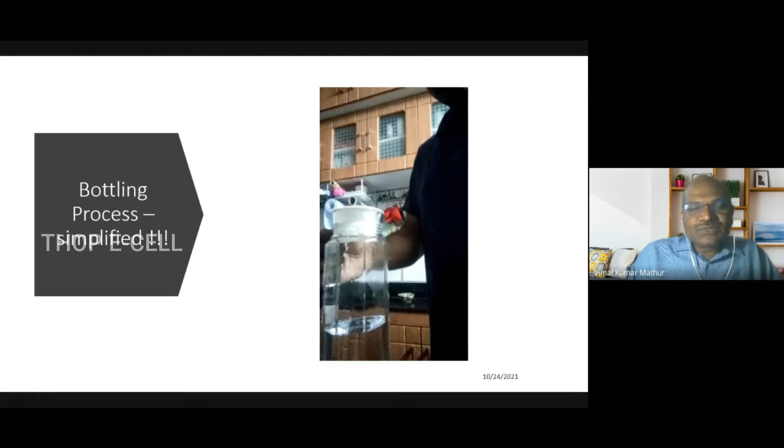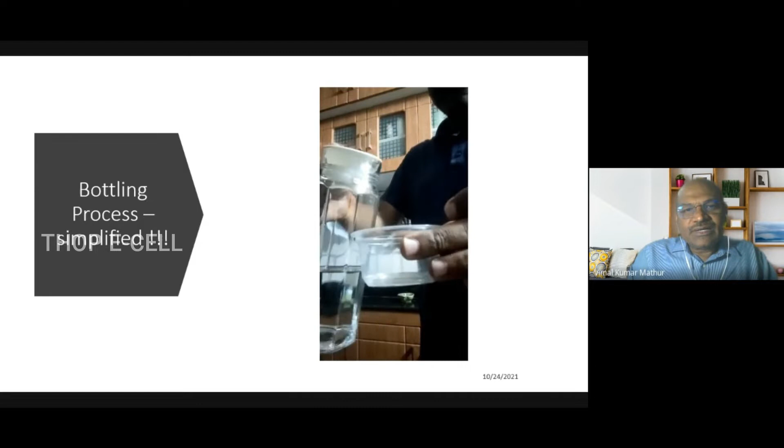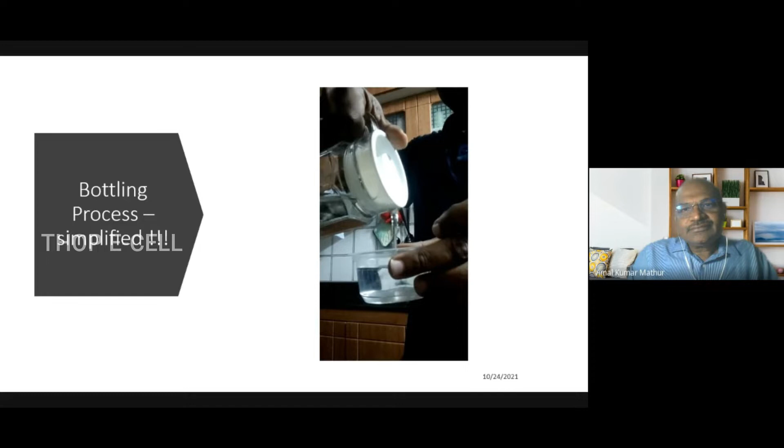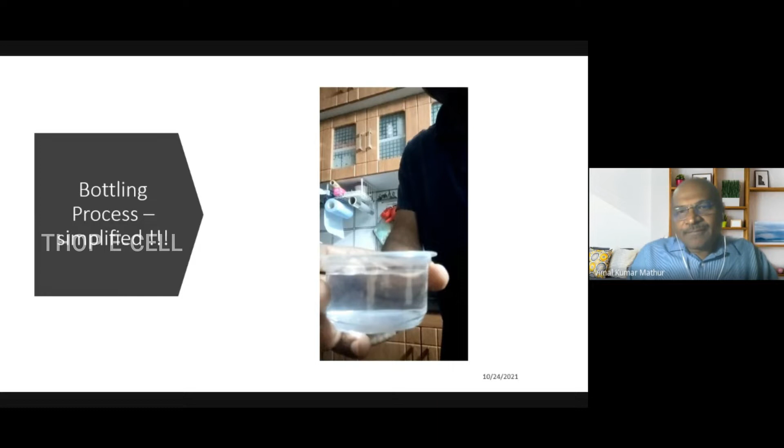To understand this simply, I want to show you one video. Just look at it. You know what we are doing here? We are pouring water from a larger vessel to a smaller vessel. This is the bottling process simplified. This is exactly what we do in a bottling plant. I hope it would have been that simple, but it isn't.

What we are handling here is not water, it is LPG. How many of you know what LPG is? LPG is liquefied petroleum gas, a mixture of butane and propane. You must know the formula of butane and propane. Propane is a C3 compound, butane is a C4 compound. They are mixed in the ratio of 60 to 40%.

And of course, it is highly flammable. The best part of it is that it can be easily liquefied at moderate pressures. This is the best property which we use in the bottling plant.

Just imagine if it was not so. If you were only transporting the LPG as gas to your house, a cylinder would last only one day, and every day you'd have to visit your distributor. Here, what we are doing is liquefying - converting the gas to liquid under moderate pressure, and bottling this in the cylinder. So you're taking home one month's requirement of kitchen energy, and after one month you replace that cylinder.

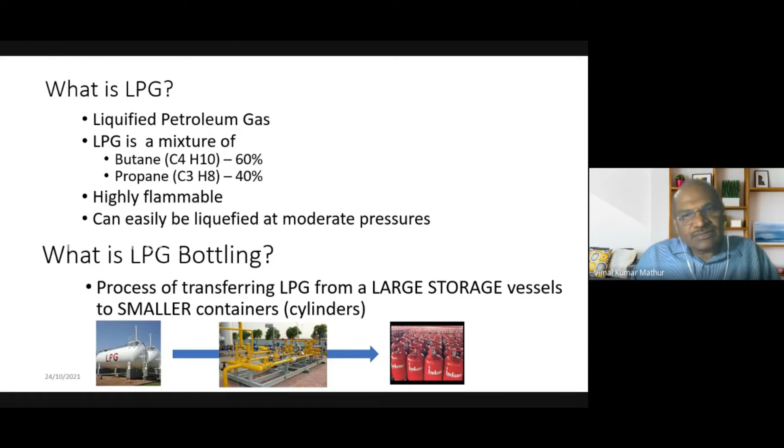Before we deal with LPG bottling plant operations, we have to know certain important properties of LPG. It is colorless. The state in the cylinder - we all think it's liquid LPG - it is both liquid and vapor. The density is only half the weight of water. LPG as gas is twice heavier than air. This is a very important property, because if LPG leaks, it will settle at the ground. It will not go into the air.

Basically it is an odorless compound, but we intentionally add ethyl mercaptan, a sulfur compound added as an odorant, just to give a feeling of a nasty smell in case there is a leakage.

The flash point of propane is minus 104 and butane is minus 60. The boiling point of propane is minus 40 and butane is minus 2. This means that at atmospheric pressure, this liquid will boil. So can we open the lids and transfer LPG? No, we can't, because at atmospheric pressure, it is in the form of a gas. So the entire system is a closed system.

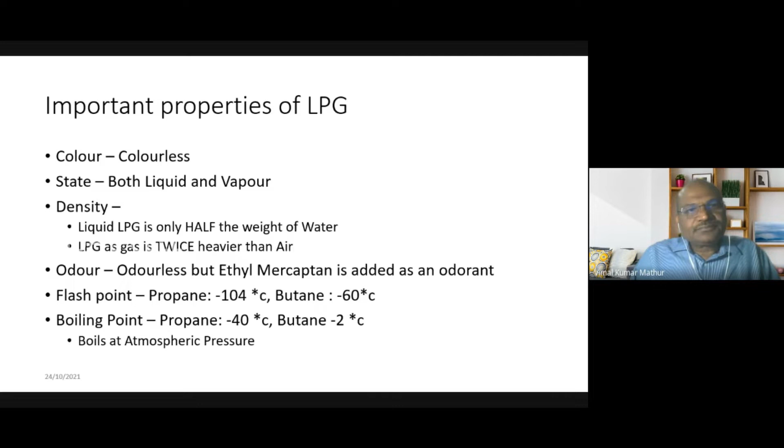This is very important - liquid expansion. With each degree, the LPG liquid will expand 12 times higher than water. The latent heat of evaporation is one sixth that of water. The liquid LPG requires only a small amount of heat to become gaseous - if you just introduce some amount of heat.

So what people generally do is put the cylinder in hot water, and whatever LPG liquid residual is there in the cylinder converts into gas, and they're able to extract that gas. Of course, that's an unsafe procedure, but for understanding, we can use this example.

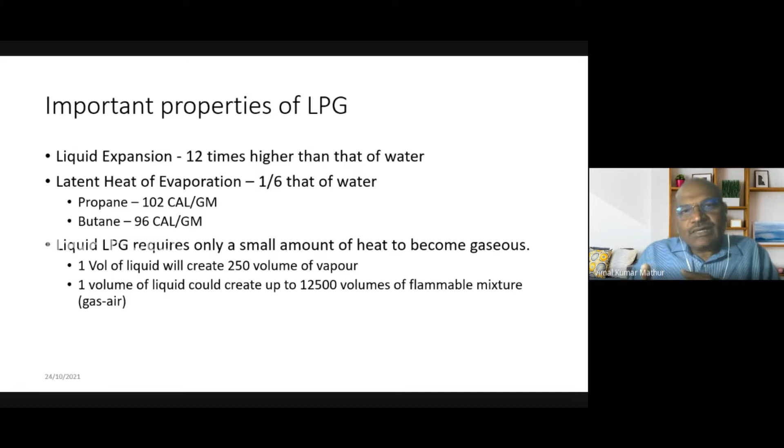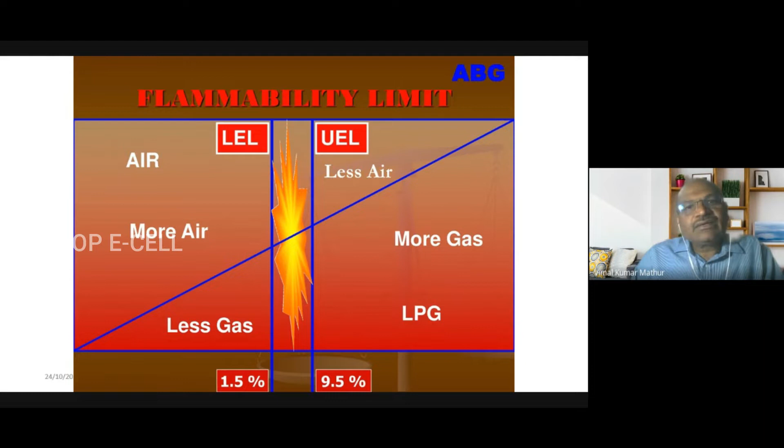The flammability limit means the mixture of air and gas in the atmosphere. If this mixture is less than 1.5%, LPG will not burn. And if this mixture is more than 9.5%, this mixture will not burn. So it is within this small range, 1.5% to 9.5%, that LPG will burn. If it is let out in the air, it will mix with the right amount of air, catch fire, and probably explode.

Let's understand the LPG bottling process. The LPG is received in bulk from manufacturing facilities like refineries. We manufacture or extract LPG from the refineries through the gasification of natural gas or distillation of crude oil. This is the topmost layer of the product which comes out.

Then an LPG bottling plant has a facility to receive, store, and transfer LPG to small containers like LPG cylinders. This we all know.

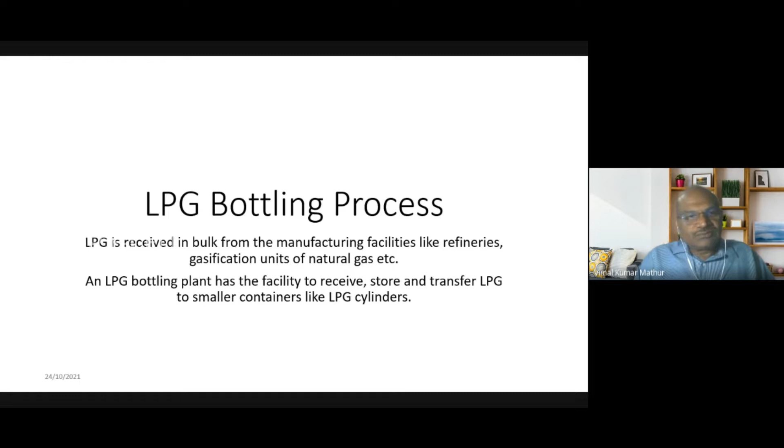Just to see what this bottling operation looks like pictorially, we have these LPG bullets. Here there are 3 bullets, each probably of the capacity of holding 150 metric ton of LPG. We receive LPG from the refineries, or through tank wagons, or through tank trucks. This LPG is unloaded and filled into these storage vessels. From here, they are transported within the bottling plant to a system called the carousel.

You must have seen carousels used in the manufacture of vaccines. Well, we also do that, but our carousels are much larger. They vary from a capacity of 12 cylinders per round to about 64 cylinders per round. So they are huge. This is used for filling LPG into the cylinders.

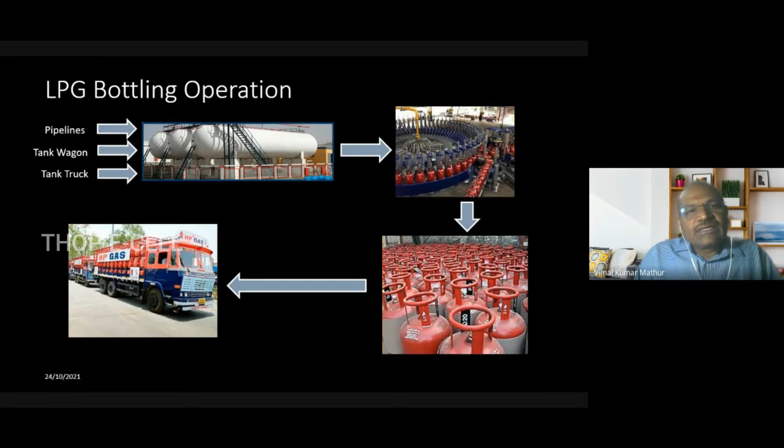These cylinders are filled, and SQC, the standard quality checks, are done on the cylinders, and then these are transported to the distributor from where they reach your house. This is a typical layout of an LPG bottling plant.

Here you see two Horton spheres, which are the storage at the center, and the bottling facility, that is the bottling carousel, is situated behind this, behind a huge shed. And then what are these blue tanks? Those are fire water tanks which are used to fight fire in case there is a fire. These contain a huge amount of water.

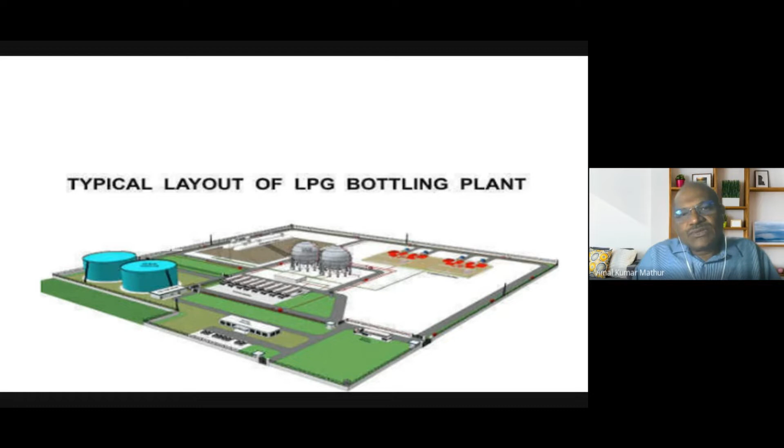The other peripheral facilities are marked in red, and this is just to pictorially show you what is the typical layout of a bottling plant.

While constructing or designing a bottling plant, we have to have some design considerations which are very important. As we just saw, LPG is heavier than air, so it settles down at the bottom. So what happens if we place the LPG bottling facility, that is the carousel, at a place which is below the level of the LPG storage?

In that case, if there is a leakage, God forbid, that leakage will travel to the carousel, and there we have the maximum number of people working. So they will be at risk of getting burnt. So what we do is, normally the bottling facility is placed at a higher level and at the upwind, that is from where the wind is blowing into the plant. So that is how we at the design level locate each and every facility.

But since we are dealing with LPG, we have to keep the safety distances and buffer zone in mind, because there are stipulations laid down by PESO, the explosive department, and the facilities are well distributed in the total layout. Storage sheds are also as per the PESO approval. PESO is an organization which gives you a license to store that much kgs of LPG. So based on that, we have to design.

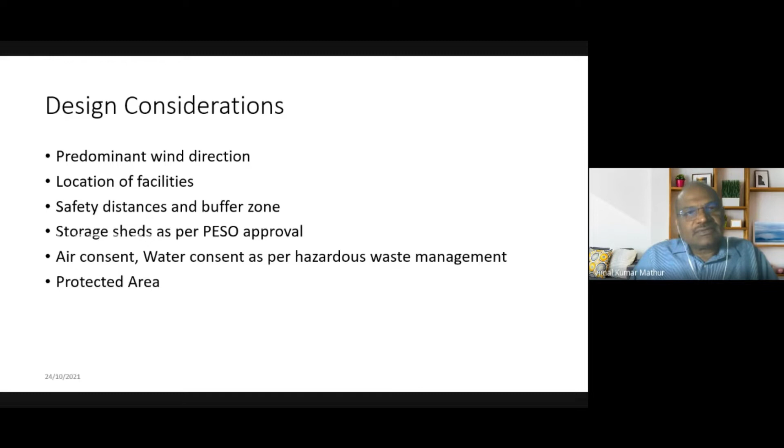We always take the hazardous waste management, water and air consent from the pollution department. And also, this plant should be situated at a protected area, basically because anybody can fire any kind of a missile, and the whole plant will get burned in seconds, not even minutes.

Basically, we divide the LPG layout into two zones: hazardous and non-hazardous zones. Non-hazardous zones are those having facilities like the office building, the supply and distribution center, the tank truck crew resting area, and the DG sets and electrical facilities.

Apart from this, we have the tank truck or tank wagon loading and unloading gantry, where we get this product, LPG liquid, in tank trucks from the bottling plant and refineries, and unload this LPG into our bullets. So this tank truck and tank wagon loading and unloading bays are the first thing you see in an LPG bottling plant.

Then we have the LPG filling shed, where we actually have the carousel which fills LPG into small cylinders. Now, if there is a leakage from the cylinders within the shed, there is a vapor extraction system situated at a low level, and we have pumps to pump out the LPG which is leaked out.

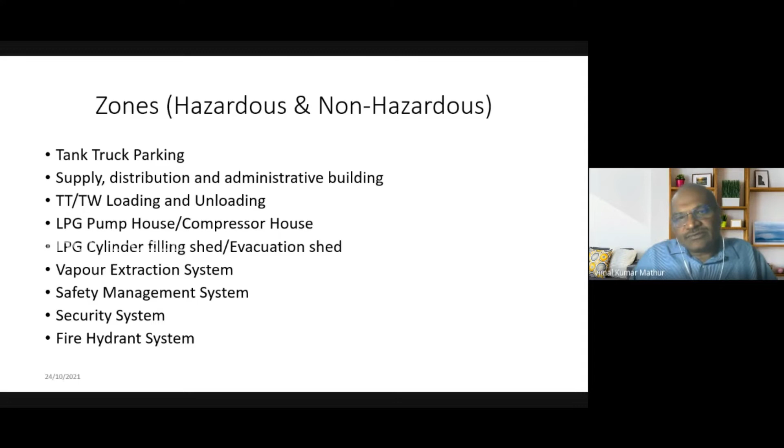These are what you get to see at the bottling plant - facilities like the electrical system. Every electrical equipment is to be run through an electrical feed, so we get electrical supply from the nearest substation. We have a transformer, and we have earthing and lightning arrestor systems.

In case there is a downtime of the electrical system, electrical supply from the regular electricity board, we have diesel generator sets which are backup. Then we have TLD, that is tank lorry decantation bays, unloading and loading arms. These are totally mechanized for unloading bulk LPG from tank trucks.

Then liquid LPG - LPG liquid pumps to pump the LPG, liquid LPG, which is received from the tank trucks into our storage. The storage is obviously at a higher level, so we have to pump the liquid. So we require LPG liquid pumps.

We have LPG compressors too, which are used to compress LPG and maintain pressure at the top, so that the liquid comes out from the bottom through a pressurized system. Now, all the automation is done through pneumatic air, so we have air compressors, pneumatic valves, and also air filters.

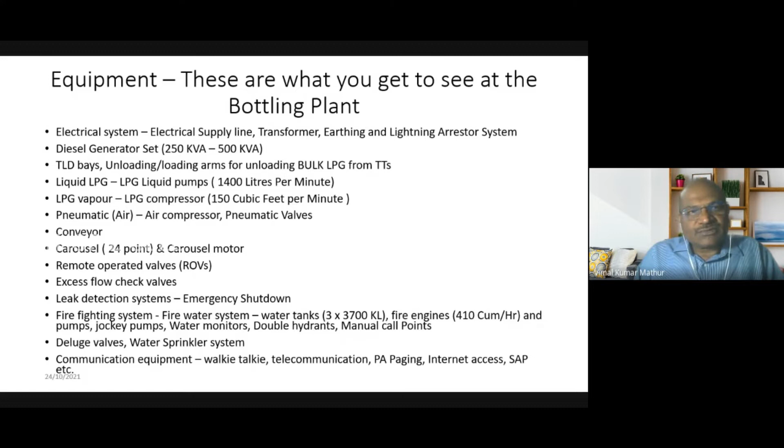To give you a feeling of what the bottling plant, the carousel, is, I have one video. Maybe you can have a look at this.

Are you able to see the video?

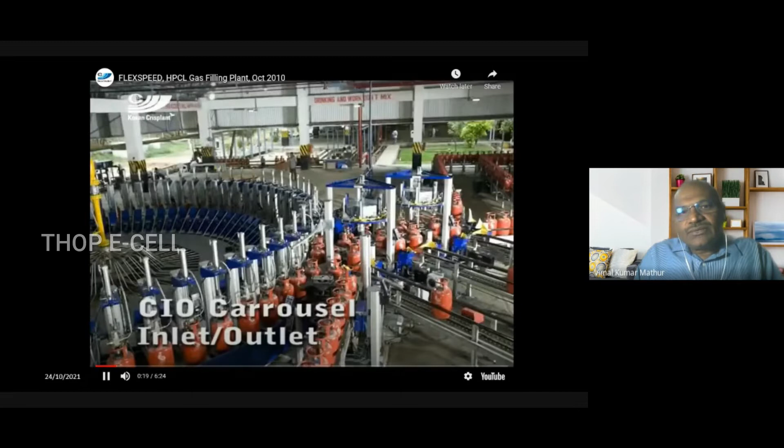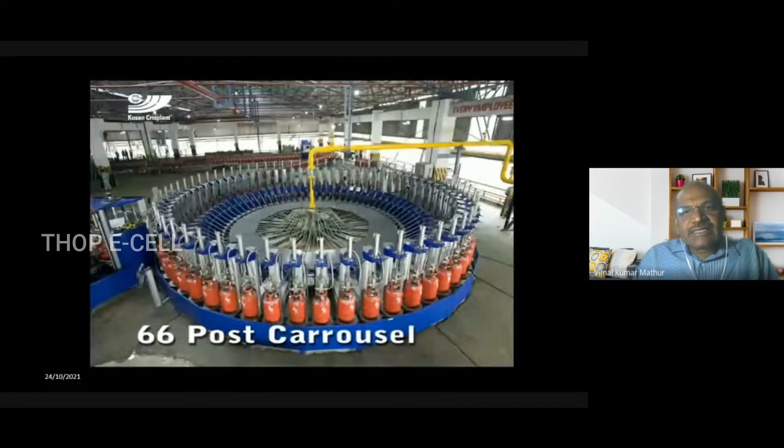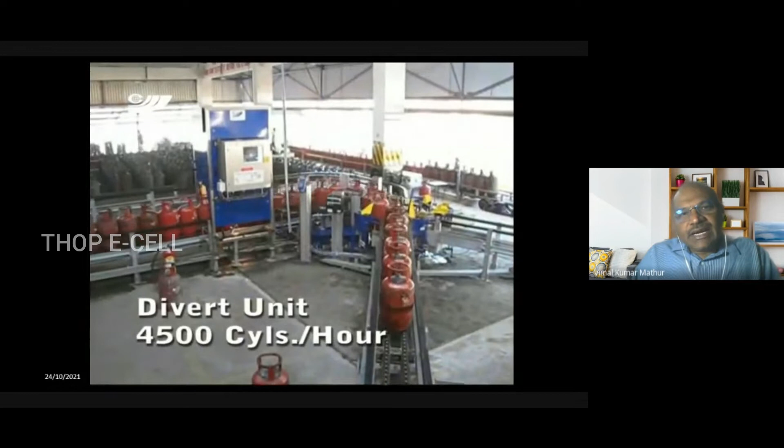Yes, sir, these are the filling guns I was speaking of. This is the carousel, a 66 head carousel. It automatically senses the empty cylinder weight and adds 14.2 kgs, then gives a signal to the gun to fill that much LPG.

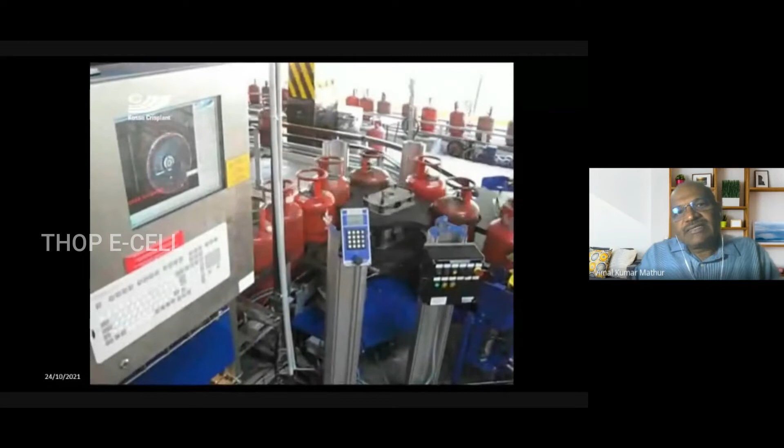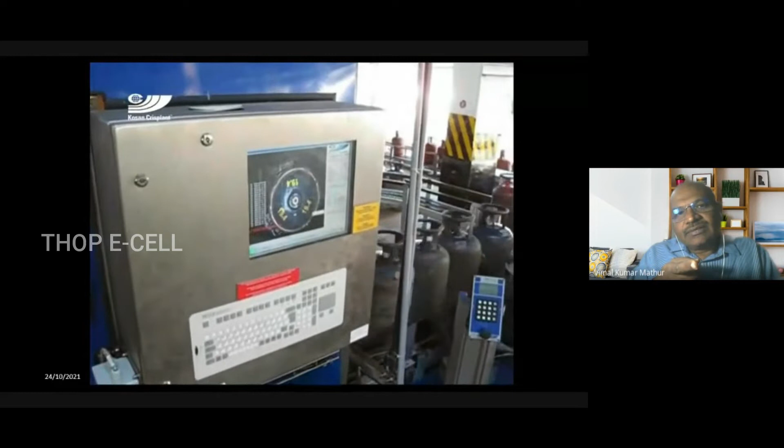These are the ways by which the cylinder moves from the empty shed to the filled shed after the filling of LPG is done. This is an automatic LPG dispenser filling machine.

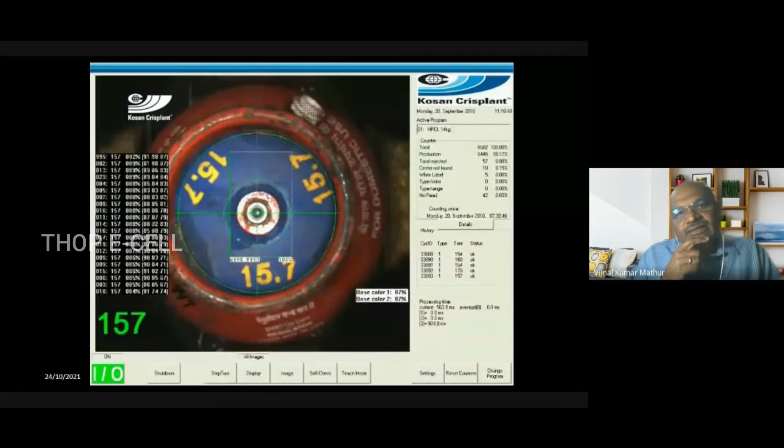This is the top of the cylinder. What is written on top is the tare weight of the cylinder, meaning the empty weight. So automatically 14.2 kgs is added, and the machine fills that much of LPG.

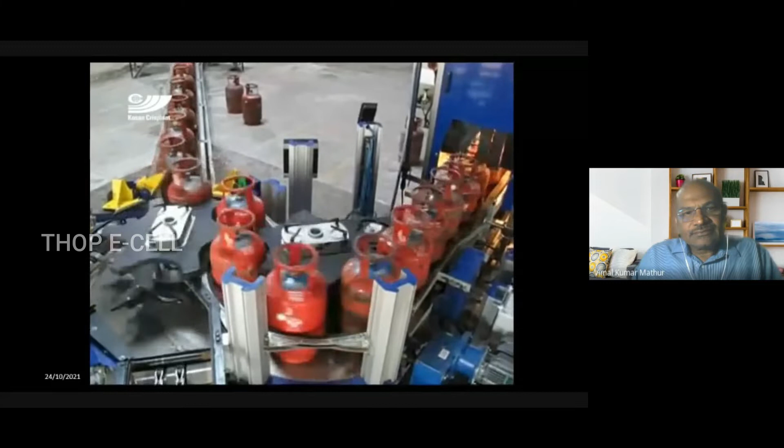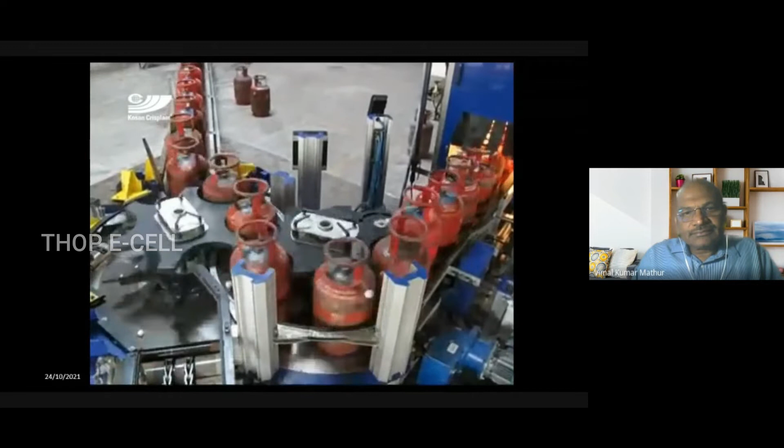Because of paucity of time, I think I have to stop this video now.

So this is about what we have. I had to show you basically regarding the facilities in a bottling plant, an LPG bottling plant. I'd be glad to take on any questions you have.

Now coming to the next topic, the introduction of the new composite cylinder. A lot of videos and WhatsApp messages are going around that Indian Oil and Hindustan Petroleum have introduced a new composite cylinder. What is this basically? We have been seeing the red cylinder, everybody must be having it in your kitchen, and some of us feel that this is an eyesore.

So what they do is keep or hide the cylinder behind a cabinet. This leads to an unsafe practice, because once you hide the cylinder, you will not be able to know whether there is a leakage or not. So there were a lot of committees which went into finding ways of dealing with this problem, to have a cylinder which looks good, so that people get motivated to keep it inside the kitchen, visible to everybody.

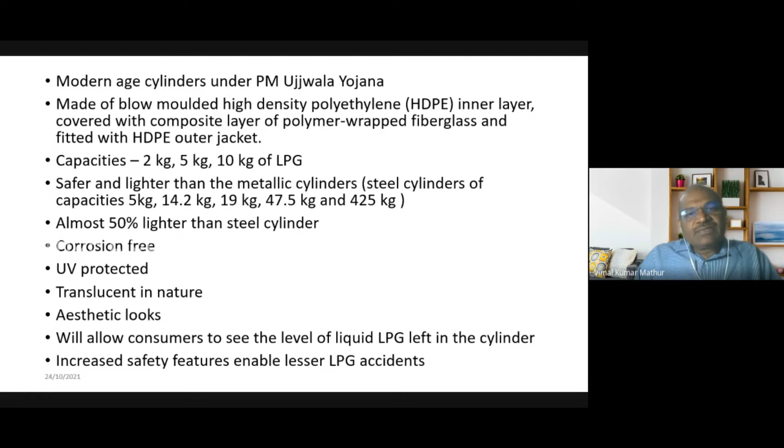It is translucent in nature. This is very attractive, because all of us have faced the problem of suddenly finding the cylinder empty while cooking is on. With normal steel cylinders we don't know the level of LPG remaining. Here we are able to see the level because the body is translucent. It looks very good, has aesthetic appeal, and increased safety features, enabling lesser LPG accidents overall.

Here also, I would like to show you this video of Indian Oil about the composite cylinder. You will get an idea of what it is.

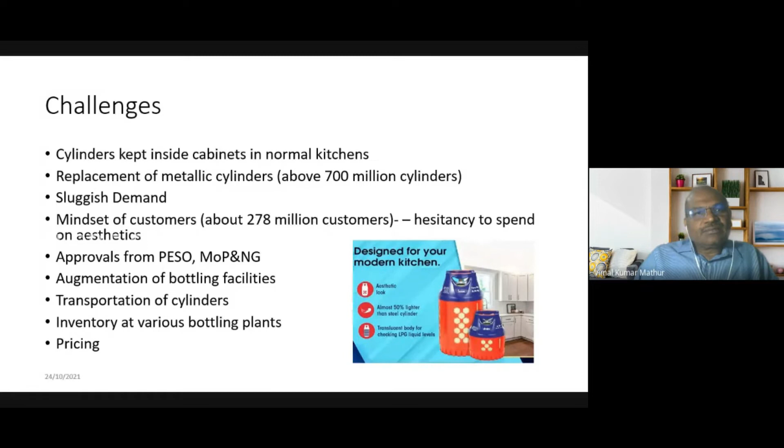Thank you. Hope you enjoyed the session as much as I did. Thank you. I am open now for questions and answers.

I'm sorry it was very brief because the time limit was just 1 hour, and I had to do justice to this.